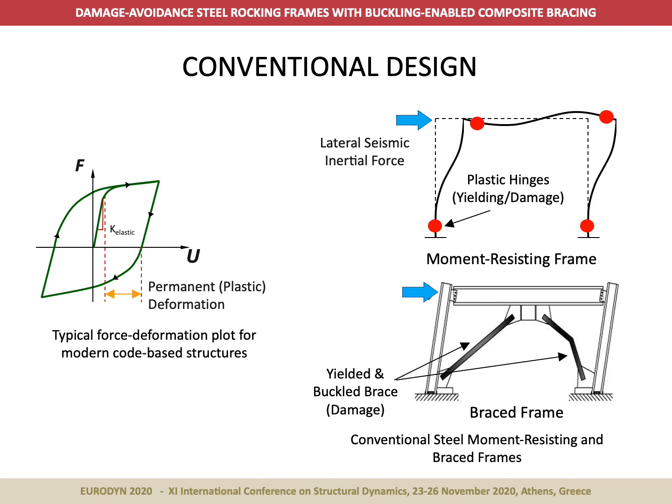The way we currently design our buildings to withstand earthquakes is to allow some of the structural elements to dissipate seismic energy by sustaining damage at designated locations. This is done to avoid catastrophic structural failure, ensure a predictable failure mode, and minimize the casualties. However, these buildings undergo major damage during earthquakes and are often left unoperational and in need of significant repair or demolition. This leads to severe post-earthquake economic losses.

My research looks at rocking frames, which are structures typically made of different elements tied together using unbonded post-tensioning. Since all the deformation is constricted between the connections, the damage to major structural members can be avoided. To improve the load resistance of these systems, elements that absorb modest amounts of seismic energy through damage are still included. Some common examples include yielding seat angles, yielding web hourglass pins, beam, web, or flange friction devices, and yielding thin steel plate infill walls.

As the name suggests, these elements sustain damage and require replacement after seismic events. Some of these elements are embedded within the structural members and can be very difficult to access. We again get a system with limited durability that requires frequent inspections. And even with these technologies, many structures still experience permanent damage.

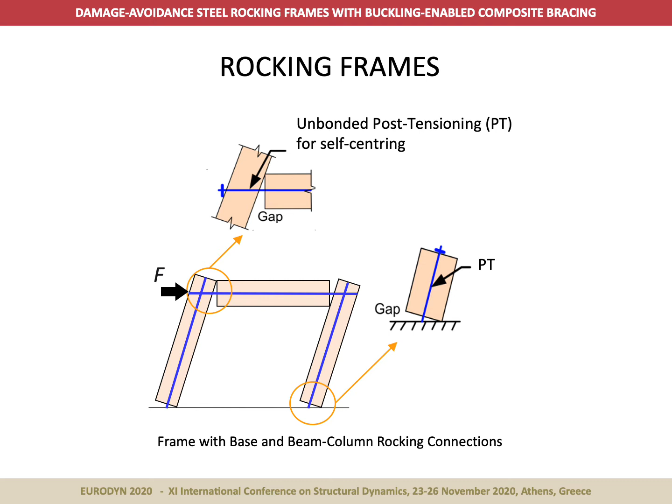Following this, the objective of this paper was to explore a passive damage avoidance solution that enhances the seismic performance of steel rocking frames. Our approach to this damage avoidance solution was to use an element that can absorb some seismic energy and after a critical load provide significant global buckling without experiencing any permanent deformation. This is more commonly known as elastic buckling. The behavior of these elements is comparable to the elastic buckling exhibited by a typical steel tape measure.

The response of these buckling-enabled braces would depend strongly on the material selection. We selected GFRP due to its high strength-to-weight ratio and its ability to undergo significant elastic buckling.

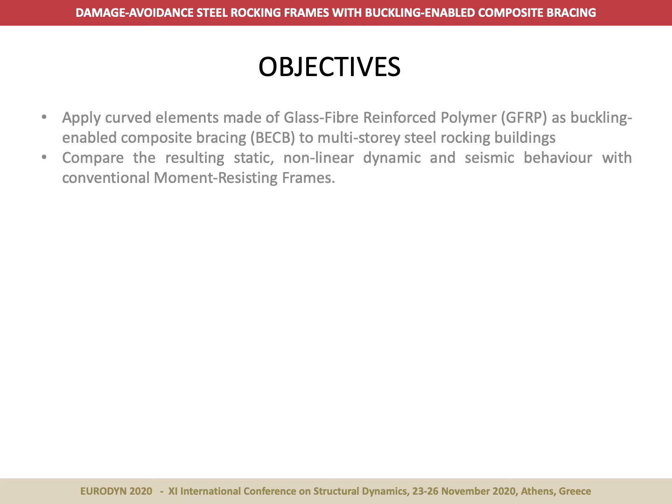The rocking frame counterparts employed identical sections as the moment frame with rocking connections at both the beam-column and column-foundation interfaces. To provide support for the buckling-enabled bracing at ground level, a floor beam was provided. A tendon cross-section of 975 square millimeters was incorporated for the beams and columns. For configuration 2, buckling-enabled bracing elements were incorporated in two bays of the building.

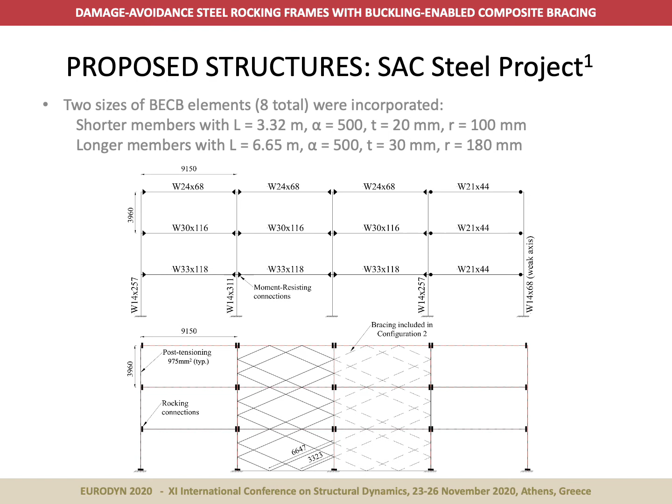The finite element program OpenSees was utilized for all numerical analysis. Force-based nonlinear beam-column elements were used for the beams and the columns. A Steel01 material model was employed for the fiber sections with their respective yield strengths. Geometric nonlinearities were accounted for by means of a co-rotational transformation. A constant stiffness proportional damping of 5% was specified for all models.

The post-tensioning tendons were modeled using co-rotational truss elements with an initial stress uniaxial material. Zero-length gap elements, or springs, were used to simulate the rocking interactions. Lobatto integration scheme was used to determine the distribution of the gap elements along the member edges. Elastic perfectly plastic material with no tension stiffness was defined for the gap element. And finally, the columns and tendons were modeled as continuous elements along the frame heights.

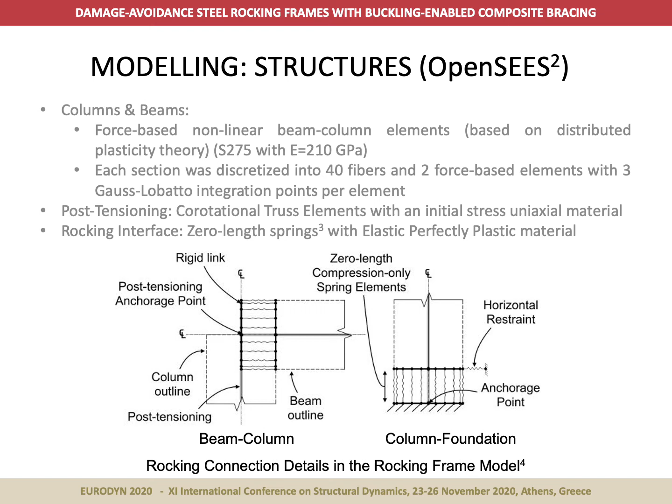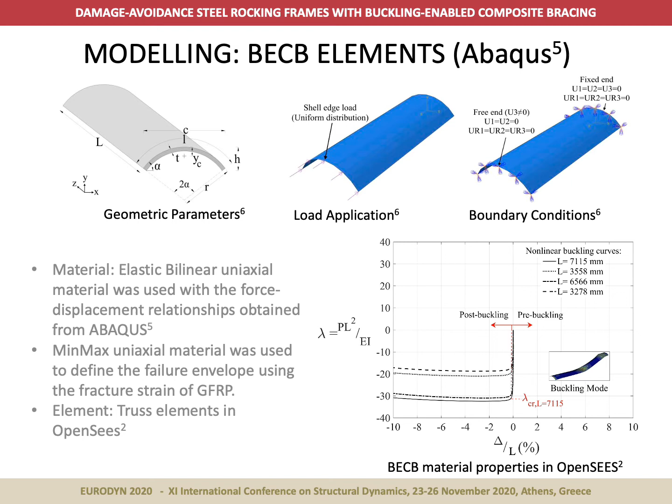An isotropic elastic material with modulus of 18 GPa and Poisson's ratio of 0.3 for GFRP was used to simulate each BECB element in Abaqus in order to obtain the respective buckling response. Elastic bilinear uniaxial material was used to represent the pre to post buckling behavior of BECB in OpenSees. Finally, the bracing elements were represented as truss compression-only elements in the numerical models.

First, a static pushover analysis was performed. A displacement control strategy was used to perform the nonlinear static analysis. The lateral resistance of the rocking frame without the buckling-enabled bracing elements was 55% lower than the moment-resisting frame.

Rocking frames with buckling-enabled bracing elements exhibited a 30% increase in the lateral load resistance, whereas configuration 2 showed a 63% increase compared to the rocking frames. In comparison with the moment-resisting frames, the lateral capacity of the rocking frames with these buckling-enabled bracing elements was 20% lower, whereas for the second configuration, it was 15% higher.

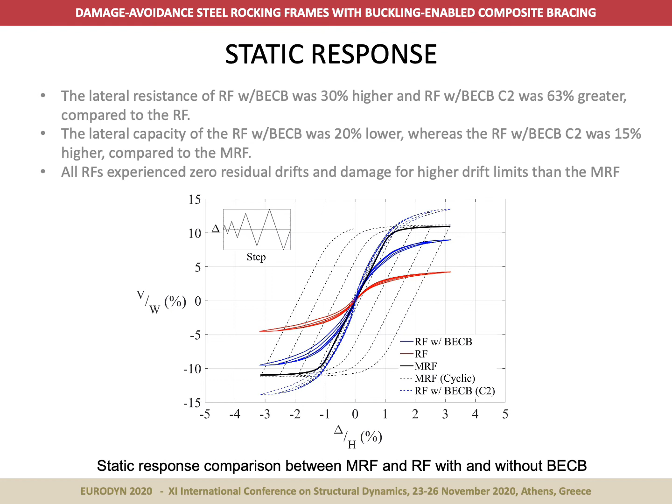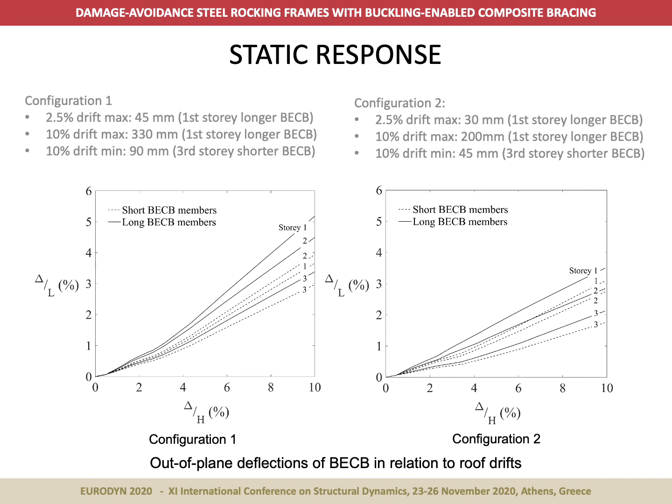Frequency response functions were then generated using discrete sine sweep input ground motions to provide insight into the complex dynamic behavior of these nonlinear structural systems. These FRFs were also utilized to identify the fundamental frequencies of the building models using the maximum inflection points of the low amplitude curves. The FRFs presented here are plotted in terms of roof accelerations.

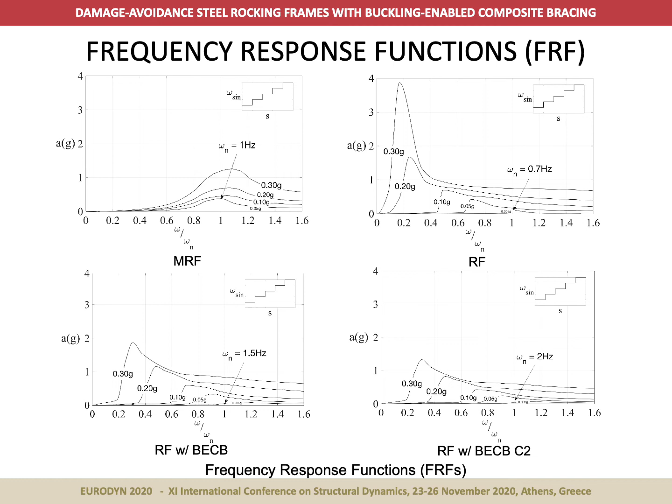The effectiveness of the buckling-enabled bracing was finally evaluated by subjecting the buildings to a set of real earthquake records and developing the IDA curves. The peak interstory drift ratio was adopted as the damage measure, while the spectral acceleration at the fundamental period of each respective building was selected as the intensity measure. The 22 far-field earthquake records detailed in the FEMA P695 report and obtained from the PEER database were employed.

A conventional steel moment-resisting frame has an IDA curve that softens after yielding and accelerates towards larger drifts. The curve then flattens out in a plateau of the IM with the DM moving forward towards infinity, indicating dynamic instability. In contrast, the IDA curves for rocking frames can be characterized by a weaving behavior, where the buildings exhibit successive softening and hardening segments. This is expected due to the inherent nonlinear relationship between the applied forces and response of the rocking structural system.

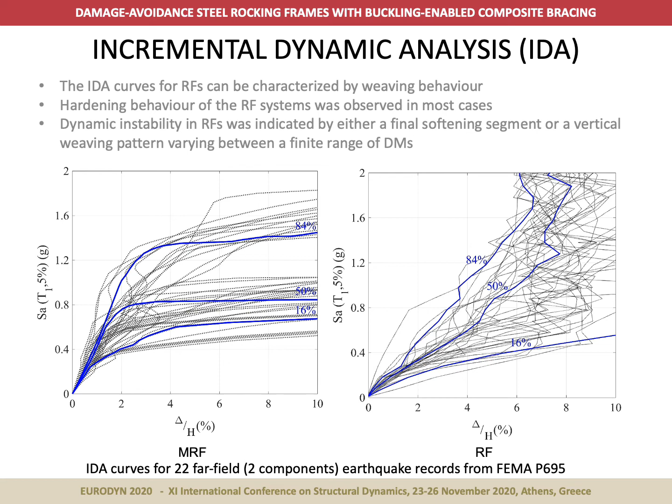Moreover, nonlinear structures typically exhibit coexisting amplitude responses at and around the system's nonlinear resonances. Likewise, the influence of subharmonic resonances and higher mode effects on the structural response also increases with higher amplitude IMs. Overall, both configurations with the buckling-enabled bracing elements consistently exhibited lower relative DM at the same IM in comparison to the rocking frame and the moment frame buildings.

The rocking frame structures also experienced minor hardening following the engagement of the buckling-enabled bracing system for the majority of the records. Among the initial rocking frame with buckling-enabled bracing models, the third-story beams in the second and third bays experienced yielding. This was due to the additional forces induced on the beam by the buckling-enabled bracing members during their compressive cycles.

Additionally, yielding due to the high compressive forces in the buckling-enabled bracing members was also initially identified in the mid-bay column on the first story for configuration 2. In addition, member yielding led to higher deflections in the connected BECB members, resulting in the fracture of the longer braces on the first story.

Following these observations, the yielded elements for the rocking frames with BECB were strengthened by increasing section sizes to accommodate the additional forces. The results presented herein reflect the response of the modified models. In the revised models, the strains in the BECB elements remained below their fracture limits, and the collapse was primarily governed by the performance of the post-tensioning strands.

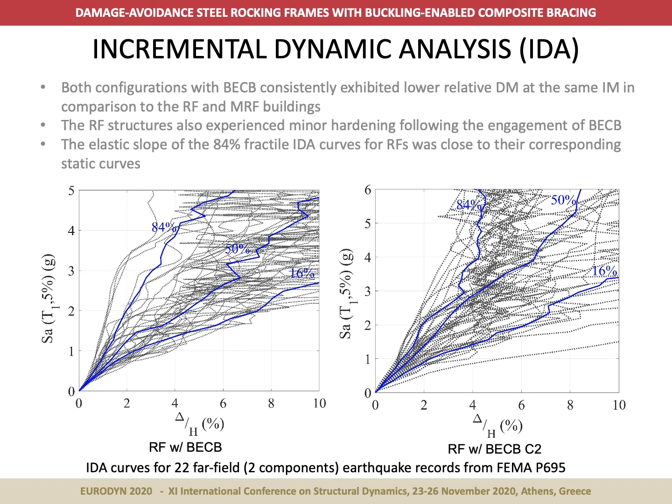A deflection of 360 millimeters at collapse was experienced by the longer BECB elements in configuration 1, which is slightly higher than that observed during the static analysis. A deflection of 300 millimeters at collapse was experienced by the longer BECB elements in configuration 2, which is also higher than that observed at 8% drift during the static analysis.

The elastic-plastic transition for the rocking frames was primarily characterized by the yielding of the post-tensioning. The first post-tensioning strands to experience damage were the beam post-tensioning on the first floor for all rocking frames. This can be attributed to the greater beam rotations at the first level, which impose an additional bending moment on the column, thereby leading to higher demands.

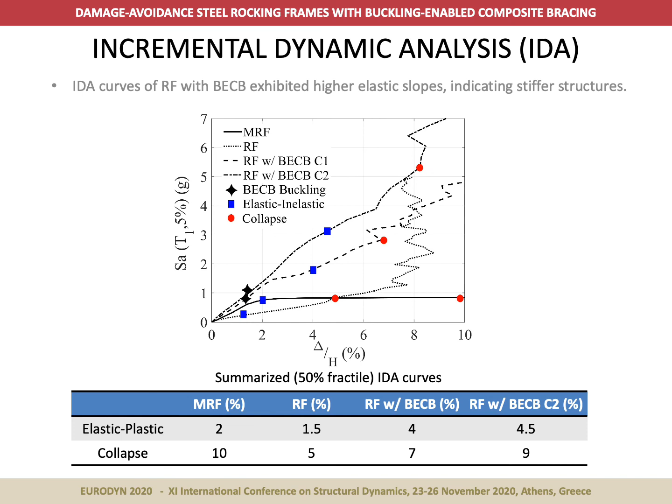These greater rotations are the result of connection asymmetry at the first level of the building, with base rocking at the ground level and a continuous connection at the first story. This characteristic is unique to rocking frames and has been discussed in our previous papers. For this reason, special design requirements are needed for the post-tensioning strands on the first and second stories.

Configuration 1 of the rocking frame evidenced the best overall combination of demand reduction and performance probabilities among all cases. The self-centering performance of this frame can be further improved by increasing the post-tensioning on the first and second stories.

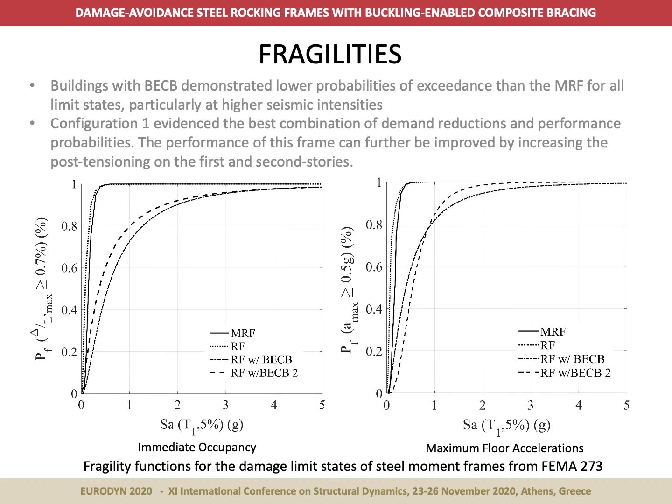In summary, this study has assessed the feasibility of incorporating buckling-enabled composite bracing elements into steel rocking frames to enhance their lateral load-carrying capacity and stability. The knowledge gained through these investigations will lead towards the provision of practical design guidelines for post-tensioned steel rocking frames with buckling-enabled composite bracing. In the study, we learned that first, both configurations of the buckling-enabled brace frames were 1.5 to 2 times stiffer than their pure rocking frame and moment-resisting frame counterparts.

Second, the rocking frame with buckling-enabled bracing exhibited maximum story accelerations and drifts that were very close to those experienced by the moment-resisting frame. Both buildings with the buckling-enabled bracing remained elastic for drifts higher than those for the moment-resisting frame. Finally, the results demonstrated that the buckling-enabled systems have enhanced performance due to lower probabilities of exceedance for all damage limit states considered, specifically at higher ground motion intensities.

It is important to note that the proposed buckling-enabled brace system relies on the controlled elastic buckling of GFRP members that do not accumulate any plastic strains. Therefore, it is crucial that a compression-only response is ensured. This brings us to the end of this presentation.